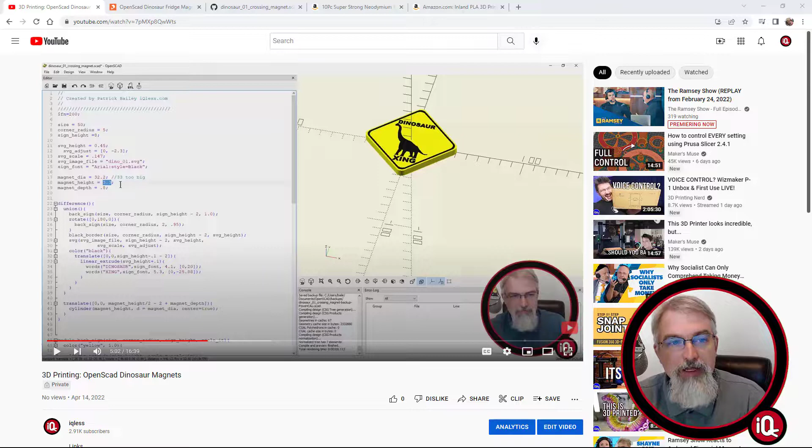Okay, first some URLs, then we'll go over how to create this and some of the thinking process behind it. I already did a video showing how to use the one that's out there, and generally how to use OpenScad and put in the magnet and things like that, so that's out there already.

This is the one we're talking about. It's on Printables, and I'll put a link in the show notes. And for those GitHub type people, it's out here on GitHub as a gist.

Also, Neodymium Magnets. Here's these Neodymium Magnets that I use, I'll put a link in the show notes. These are the big, thick ones. They're $2.40 a piece, but they're powerful, strong, and I really do like them.

And then lastly, here's the yellow that I'm using for these signs, I'll put a link in the show notes. It's the yellow PLA, and it works pretty good. So with that, let's get going on all the OpenScad joy.

So let's get down to this and show this. Here's the one that's all full, but we're going to start blank and show all the little details on there. First of all, we need to start off just by making the sign itself, the square kind of tilted on the side.

Well, first of all, you see that FN 200 at the top there? That just tells you how much detail to put in the whole thing. I forget what the default is, maybe it's 100, I'm not sure on that one. But you can set it, and the higher it goes, the more detail, the lower it goes, the less detail.

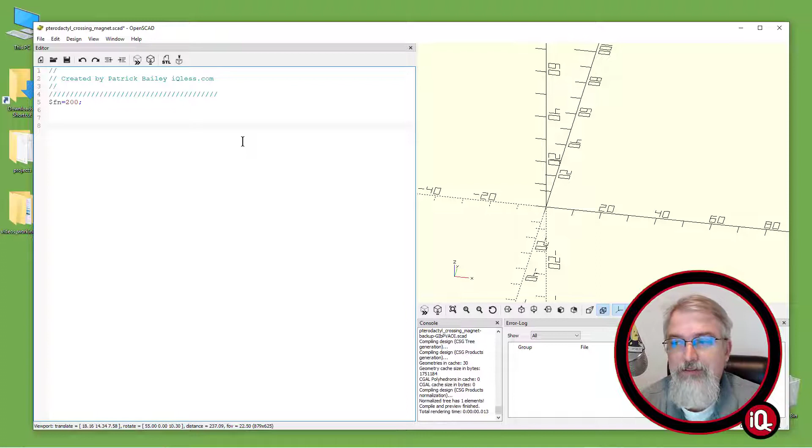So you can change it, it becomes more boxy. But also, the higher it goes, the more time it takes to process. I just kind of use 200, I just kind of like that. It works real well for me right now.

Okay, so we'll start out, we're going to set the size of this. So we'll have a variable called size 50. And then we'll start with a module here, which I called backsign. So we'll say backsign, and we'll pass in the size, or it accepts the size.

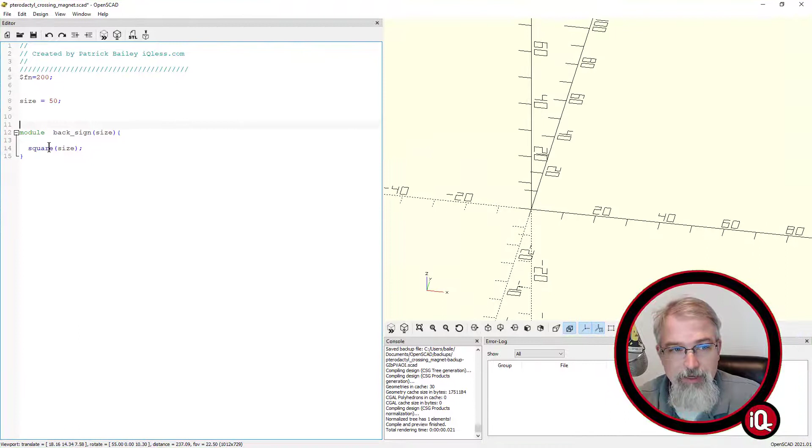Then just to start off, we'll say square, although we're not going to actually go in that direction. But we'll say size, and right now I have that module, but I'm not calling it, so if I run this, I should see nothing happen. So we'll start off and we'll say backsign, and we'll say the size. Boom, we run that guy, now I've got my square.

Now that's all well and good, but one thing I want to do is turn it, which I could rotate 45 degrees, and that would do what I want. Let's do two things just to show you can do it. So we could say rotate 45. Boom. And that gets our look.

But also, I'd kind of want it centered, just to make it easier to place everything. So I could say center equals true, and then it will start drawing from the very center. Very nice. So I could do that if I just really wanted a square, but I like having the rounded edges, because the minute I make something too sharp for a magnet, someone's going to poke themselves, right?

So what I'm going to do is use circles and hulls. I'm gonna come down here, let me see what I have here. Okay, we'll come down here and say a corner radius, because I may want to change that radius, make it bigger or smaller. It looks like right now I'm using 5. So we'll say 5, and then we'll pass in that corner radius. Boom. And then we'll make that a variable.

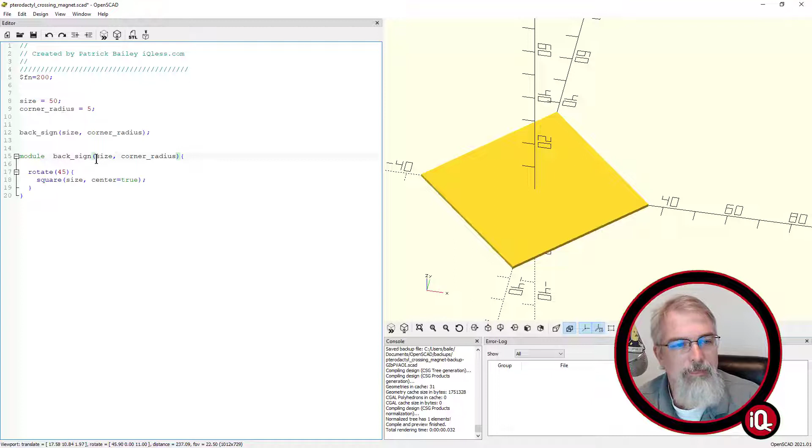So now we'll come down here and say circle of corner radius. Boom. And I'll just remove this stuff since I don't need it anymore. Boom, so now I've got this circle. But what I want to do is make 4.

And I'm basically going to position them, put one up here, one over here, one over here, and one over here. We're going to connect them via hulls. So I'll come down here and see what I did. Got to do a little bit of math here. The distance, they're all going to be equal distance from this very center.

So one will be up a distance of whatever. That's not going to actually be 50, we're going to use a different number. And distance down, distance left, distance right, it'll all be the same.

But we're going to do a little math because of the size. If I moved them that distance, the size across, corner to corner, would be twice that - it'd be 100 millimeters, but I don't want to do that. So I'll say sine 45 times size - I could really just use that.

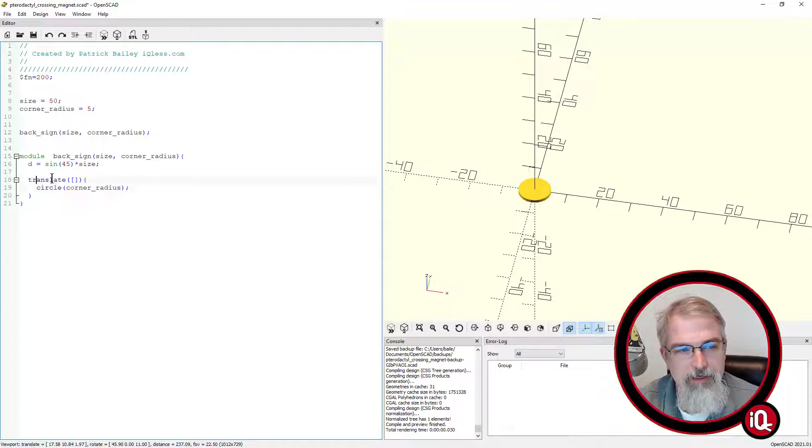And rather than use that, I'll say translate. When you translate, let me just circle this, you can do an X, a Y, and a Z, but you don't have to do the Z. I could do a 0 - we're not moving anything in Z in this case, but I could put a 0, or I could just not put it in there. So I'm just not going to put it in there.

And then what I'm going to do is go over D in the X and up 0. So boom, I got that one moved. And now we'll go make another one. This one we'll make it 0 and D.

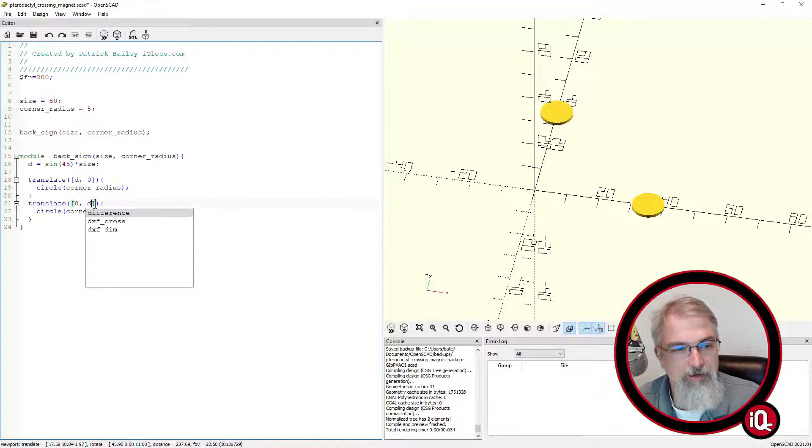There you go. Now, before I just make all 4, I'll do something interesting. For those who aren't familiar with hull, it's a nice little command that will kind of attach everything. It's really nice, and I think for the math nerds it's actually a really nice system. Now you can see it attaches those two.

Now if I have another one, it'll attach the next one. So I can come down here. But when I attach them, it's going to try to connect them all, and it'll kind of try to go on the outer edge of all of them, if you will.

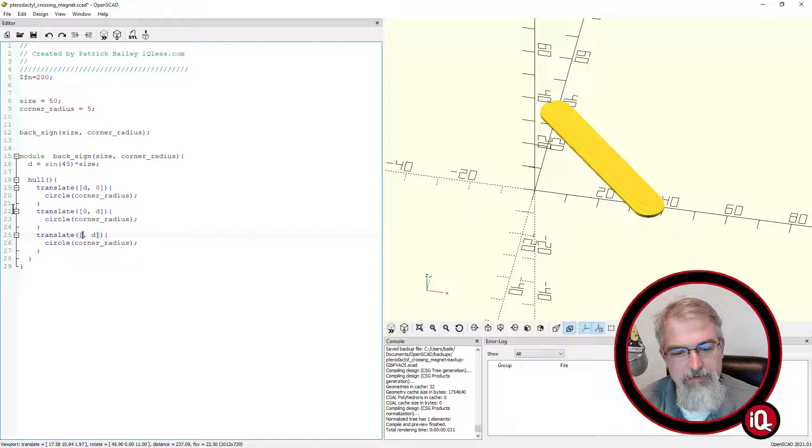So this time we'll do negative D and 0. And boom. Now, not that we need to do this in this case, but just to show you what happens if we wanted to have that little strip go up and down - what we could have done is made 2 hulls.

If I want to do something magical like that, I could say 2 hulls. So I could say, okay, we're going to do that one. Boom, boom, boom, boom - oh wow, I'm repeating it. And then do those. That would work. I'm trying to think my way through this.

And boom. So this part attaches this one to this one, this part attaches this one to this one, and they kind of overlay, so you get that effect. If that's something you want to do, which we don't want in this case, but it's interesting to know interesting ways you can use that hull tool.

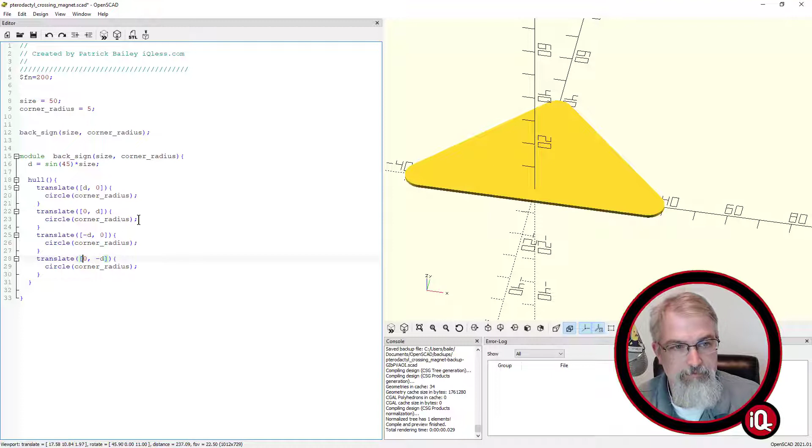Boom. Okay, so lastly, I need to add the last circle. And this one will be 0 and negative D. Boom. So now we're getting that outline kind of how we want.

Now, I'm going to need to reuse this shape in several cases. And if you look at this, I've kind of reused it, let's see, 1, 2, 3, 4 different times. So I've used it once just for this extrude right here. I've also used another one to kind of make this bevel to the bottom, because I found out magnets - you kind of don't want them flat against the fridge.

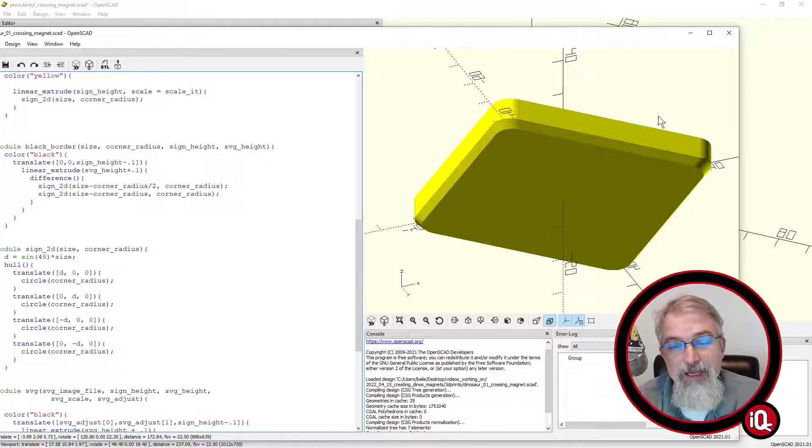You want to have it a little bit off there so you can get a grip on them if you need to - I find it helps. And then also this little black part around here is 2 of them - it's a big one minus a smaller one. So I have to make it 4 times. So it's a good time to reuse that code.

So I'm gonna separate that out. I'll make another module, and I'll call it module sign2D, and it takes a size and a corner radius. There we go, if I can spell. Boom. And then we'll just take all of this - that's exactly what we want - and we'll just dump it in there.

And nope, I grabbed one too many things. Boom. And then I'll come down here and I'll say I want to do a sign 2D, and pass in that size and that corner radius. Boom. Okay, same effect. I haven't done so, but now I can reuse this. I can use this again and again.

So now the next thing I want to do with this guy is, well, first I want to color this one yellow. And I'm going to put an alpha in here, but I'll put an alpha of 1.0, which means it's not see-through, but I just want to put that alpha there for convenience when I do want to tweak it a little bit to make it more see-through.

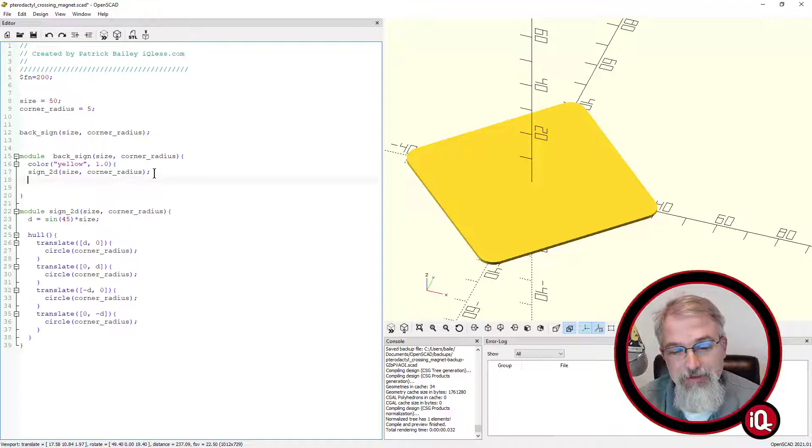For those who don't know, and I had to go learn this myself, when you use this alpha, 1.0 means completely opaque, non-transparent, and the lower you go, it goes between 0 and 1, so 0.5 is kind of like halfway see-through. But you'll see that here in a bit.

Okay, so now we've got that, and I want to do a linear extrude. Linear extrude. Boom. But how much do we extrude it? I'm looking at the wrong thing in my other code here. Boom, boom, boom, got distracted. Sign, there we go. Linear extrude. Oh, I'm using it, never mind.

I'm not linear extruding here. I could. But I'm not, apparently. Oh no, never mind, I am. I did, and that makes sense. Some of these times I look at my old code and I end up fixing things. In this case, I just got myself a little off track.

So we'll do a linear extrude, and what we're going to do here is we're going to do a linear extrude of the sign height. So we'll put a variable here called sign height, and... I keep messing myself up in my mind here. Back sign, back sign. Yep.

Why did I put a scale here? I did something confusing to myself. Let me see. Oh, well, I have some code in here that I don't need. That's funny, look at the side.

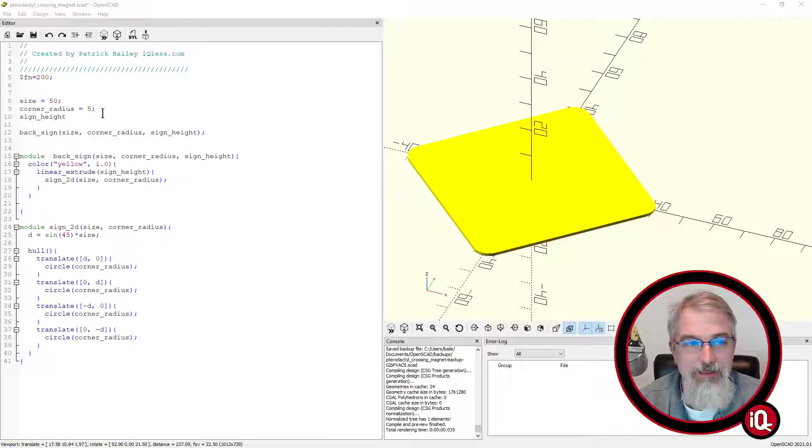Okay, so we'll have this linear extrude, and we'll use the sign height. Okay, so we'll pass in that sign height, and then here we'll pass in the sign height, and then we need to set the sign height. And let's see what I set it to before. I set it to a sign height of 8.

Boom. So with the sign height of 8, now if I do it, it'll actually have some depth to it, and there we go. And the nice thing now, I can tweak it a little bit. If I didn't like that radius, I could make it 15, make it a much bigger radius, and do everything based on that. Yeah, there's a point of contention there.

Yeah, although that size, there's some bad code. Because, let me make sure I didn't do it differently in my code. Yep, I didn't account for the corner radius. Okay, so there's a problem. So if I wanted this to be consistently this size, here we go, fixing some code.

What I want is this distance to be equal, so I need to account for the radius. So if I make this radius bigger, it's going to be bigger, and that's not probably what I want right now. So I need to account for that. So I have this corner radius and the size, which means you have that go out, you have the size, and then you actually have to subtract the radius, don't we?

Subtract, I think you subtract the diameter. 2 times that, boom. Which is going to make that smaller, which means I actually have to add that diameter back in up here, and there we go.

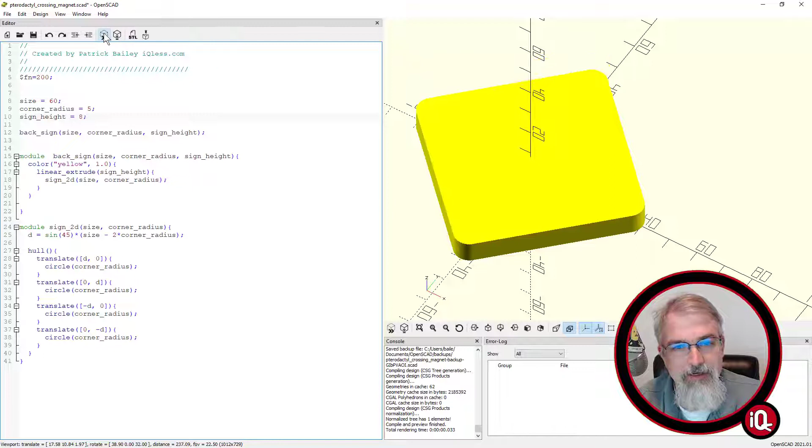Okay, there's some code I need to fix. So around that being 50, we'll make that 60. And now we're a little more parametric, so I can keep that size and change the radius. So I already found some bad pieces of my code. Okay, so 8 is the depth. I can change that to 18. There we go. Okay, good. Already fixed the code. Or made an improvement.

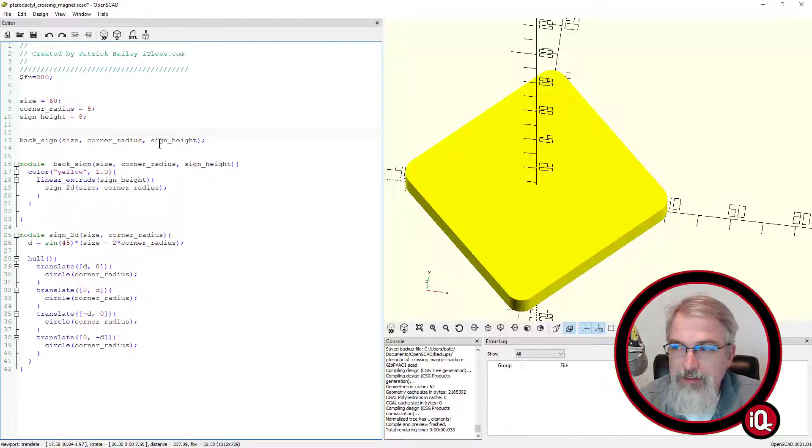Okay, so we got this yellow here. So now the next thing I want to do is reuse this back sign, and we want to pass in... we want to make a black border. Oh sorry, let's actually make the bevel first.

I just got up to my code. We do want to pass in one more variable. We're going to pass in a scale, and so we're going to have this scale here. We'll say it's 1.0.

And we're going to come here and pass in this scale again. We'll say scale equals... we'll just call it scale it. Boom. Because we're going to come down here and scale it as it pulls up, you can tell it to change its size. So we have to set the variable scale equals scale it. There was a reason I did that.

Now if we do 1.0, nothing happens. Let's see, it's complaining about something, line 19. Oh, linear extrude. It's in the linear extrude, sorry, not in the actual, my bad. In the linear extrude, that's when you scale it.

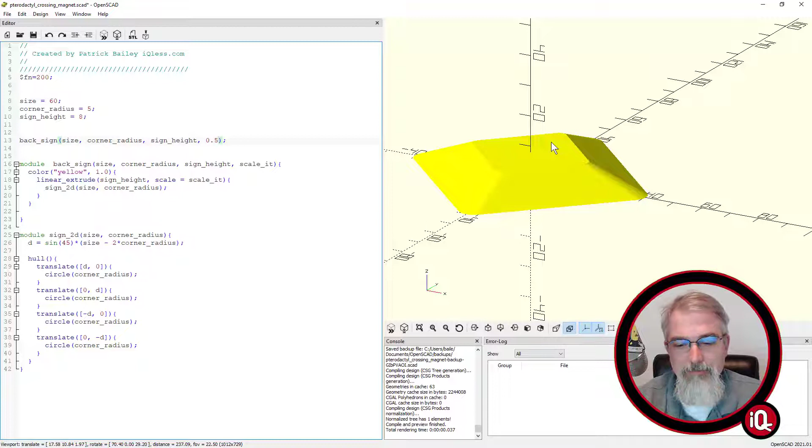Now if we're scaling it by 1.0, no changes. That means it's going to continue up the same way. But if we change this and put in 0.5, we'll see it shrinks as it goes up. Now for this first one, we don't want to do that, we want to keep it at 1.0. But actually in this case, we're going to hide it a little bit. I know what's coming out. Okay, so we'll get rid of that.

Because what we're going to do is make the bevel go up, and then we're going to flip it. So we'll say this bevel is going to be... let's see, what are we going to do with the bevel? Size, corner radius, but we set it as size. Yeah.

We're going to say sign height. Ah, there we go. Sign height minus 2. And over here we're going to put 2. We're going to make this a set 2 for right now, but we could make that a bevel height. So we can say bevel height.

Equals 2. Yeah, let's make it a variable. I didn't before, it's probably better to make it a variable, that way it's easy to tweak because it's in 2 locations. Okay so the bevel height, and we got the sign. Boom, boom, boom, what do you not like about that? Ah, I forgot to put my semicolon there. There we go, semicolon. Now we're good.

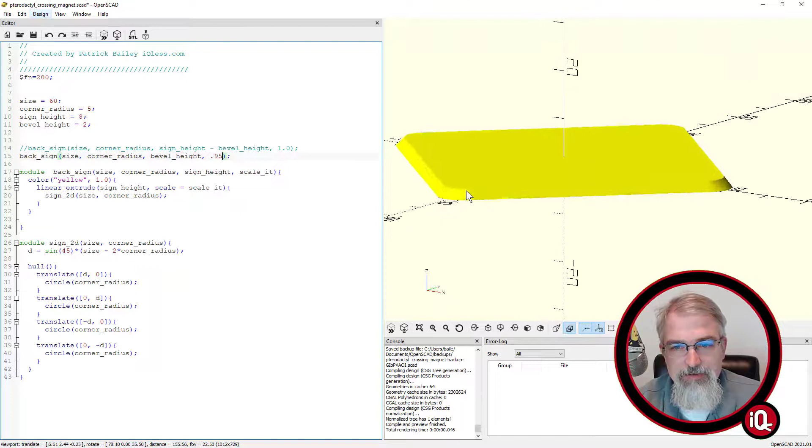So we got the bevel height, but here we're going to scale it a little bit, and we're just going to say 0.95 and have that as a set. So you can see it just kind of bevels in just slightly. But right now, after doing that, it's not the right way.

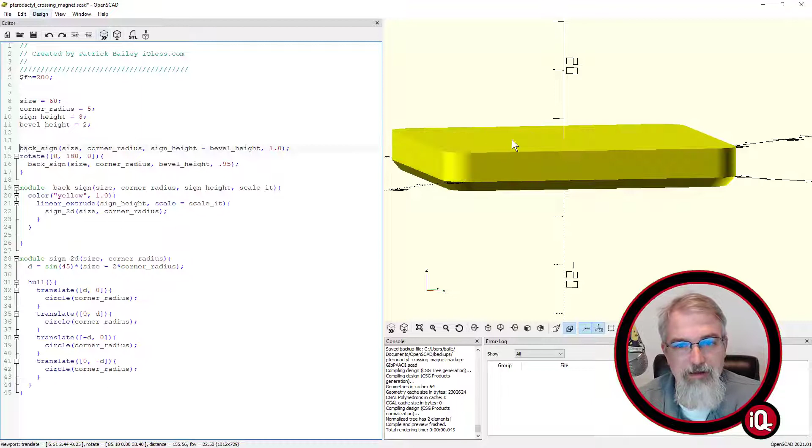I need to flip it upside down. So we'll come over here and say we'll rotate it. Boom, boom, boom. And we'll say we're going to rotate it 0, 180 to flip it over, and then 0, and it should flip over. Now it's upside down. And now if we bring this guy back, boom, now we got that little bevel, and we kind of have the base of where we want our magnet to be.

So fantastic, so next we're going to bring in that black border on the top. So we're going to come down here and say... I don't know what I called it, I called it back border. So I'll make a back border, which I'm going to pass the size into, because I need the size for the top. And I'll say corner radius, and the sign height. I need to know where it is, minus the bevel height.

And let's see, and then the SVG height, because we're going to bring in an SVG at some point, and we want it all raised just a little bit. So now we'll come down here, the only variable I'm missing now is SVG height. Boom, and what did I call that? Boom, boom, 0.45, 0.45. Okay, so we pass that all in.

We got this border, back border. Fantastic. And I'll come down here and say module. Boom, boom, boom, boom. Now if we run it right now, nothing should happen. I shouldn't break anything, but I did break something.

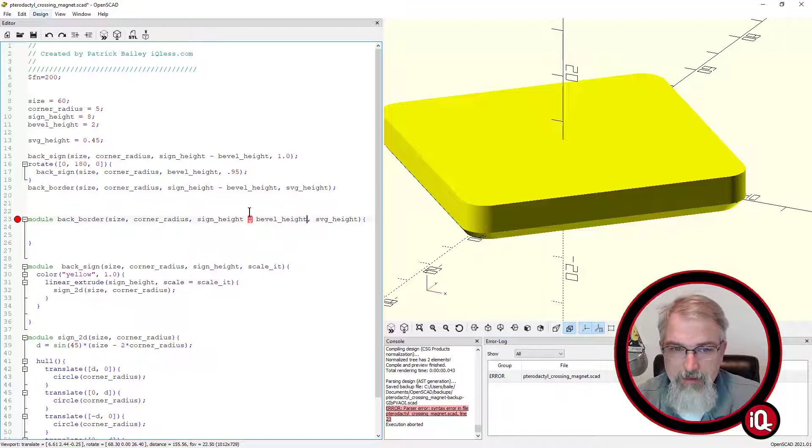Oh, I will call that... well, I need to change that into a variable, so what did I change that into? Back border, sign height. I just called it sign height in here. Okay.

Well, call it top height, what it really is. Okay, so there's the top height. So we got this back border, and we're going to come down here, we're going to color this black so we can see it how we expect it to be. And again, I'll give it an alpha of 1.0.

So now we're going to reuse that, well, let's just so we can see it, we'll comment these guys out here real quick. And we'll come down here and we will say assign, we'll reuse the sign 2D. In fact, I'll just kind of copy this sign 2D right down here.

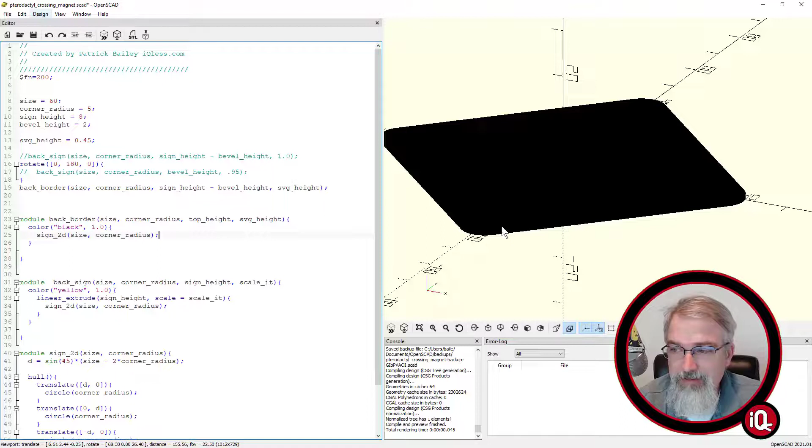We'll say sign 2D, size, corner radius, right? Boom, so we get this big guy. But we don't want it quite that big. So what we're going to do is we'll say the size, corner radius. What am I going to do? So what I did is I said size minus the corner radius.

Just using that as a variable there. Corner radius divided by 2. So it gets kind of close to the edge, but it's programmatic. And so what I'm going to do is I'm going to take that one and then make one that's slightly smaller. In this case, I'll actually subtract the corner radius. And now if I run this, they're both over top of each other so you can't tell.

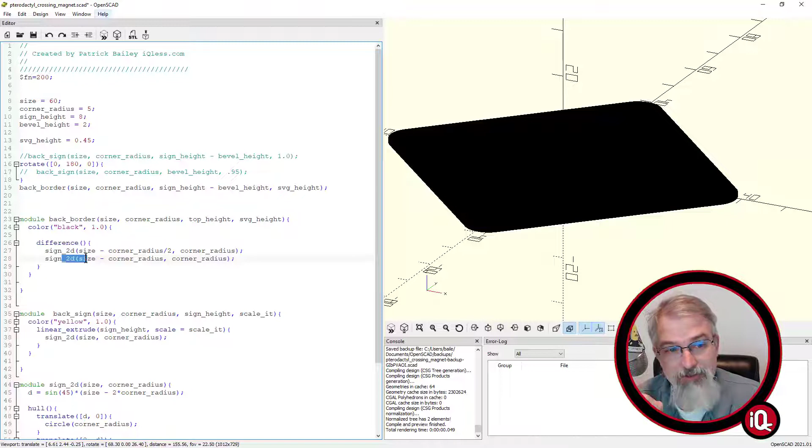But I'll do a difference. And for those who haven't fiddled with a difference, what difference does is it takes whatever's first here, it'll create that, and everything else afterwards, it'll subtract that shape from it. So just be aware that if you have more than one shape beyond the first one, it'll keep subtracting, which is useful. Boom, so now I've got this.

But I do need to extrude it. So I'll say linear extrude, and I will extrude it the SVG height. Right? Well, the SVG height. Now in my case, I keep adding a little 0.1. I don't know if it's really necessary. I'm just a little overkill to make sure it actually.

I add a little bit, and then I move it down a little bit just to make sure that the shapes are within each other. And then when I do a union, we don't have any issues with faces. I may be a little overanal on that. It may not be an issue, but I continue to do it.

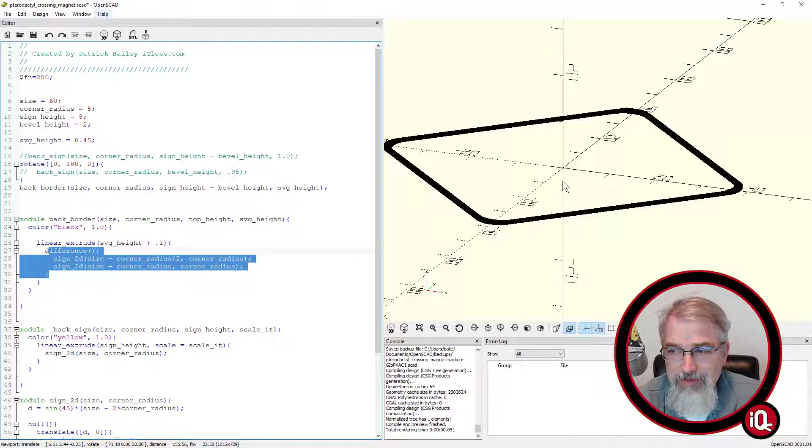Okay, so now we have that. If I bring back, and this actually has a depth that's just very thin, but it has a depth. If I bring back the other guys, we're going to miss it because it's actually inside. But we can come back into this yellow, and we'll make it a little see-through, 0.5.

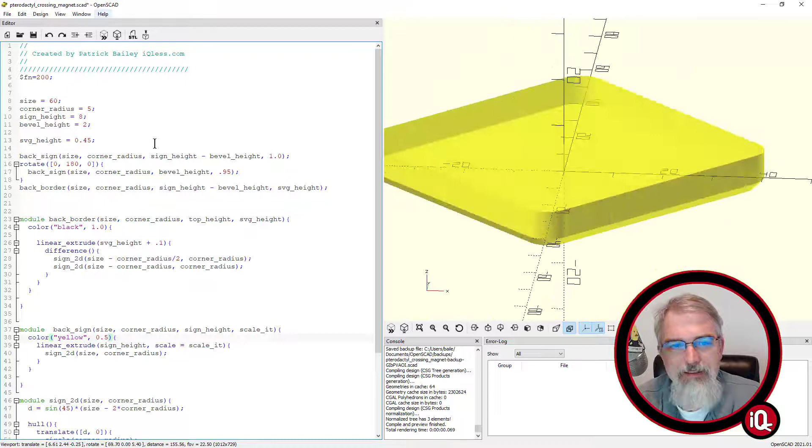You would think I would be able to see it. But apparently not, I'm not see-through enough. Let me make myself really see-through. Huh, well, so much for that. You'd think you'd be able to see that black, but I can't. Okay, well, I'll give up on that for a moment.

But suffice it to say, it's there, but it's actually at the surface. We need to move it to the top. So I need to come back here to the sign, to the back border. Boom, and we need to do a translate.

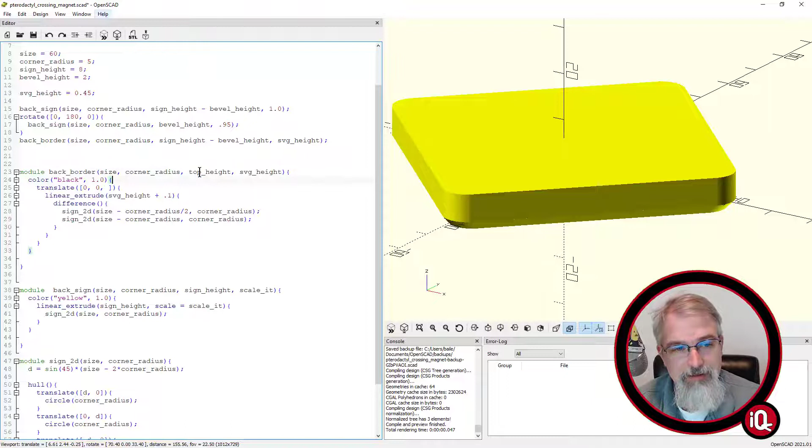Boom, and I don't need to move it in X. I don't need to move it in Y, but I do need to move it in Z. And I need to move it to that top height to get it right at that border there, but I also want to subtract just 0.1 because I added that back into the height afterwards. Otherwise, because I want it to be a little bit lower. And boom, there I go. We are right exactly where I need to be.

So now the next thing, let's see, now the next thing we just need to add the SVG. So we'll come back in here and we'll say SVG. I just called it SVG. Okay, so I'm going to make a module called SVG. SVG.

And then we'll come in here and we'll make it empty right now, so nothing there. Then we're going to put some variables in here. So we'll say SVG. What did I do? I'm going to say SVG. I want the image, SVG image file.

Now, located in the same directory, I have dino_01.svg, and I can bring that in. Now, if I don't know exactly where the file is, or if it's not in the same folder, I can go over here and grab that file, choose a different line just so you don't get yourself confused, and then drag it over and drop it. And this will show you the entire directory, where it is, and it'll work. But in this case, I'm in the same directory, so I'll just continue on in this fashion. Okay.

Okay, so we've got the SVG image, and then I want to do an SVG scale. I'm going to have to scale it. And it looks like I did 0.147, but you could adjust it based on whatever image you bring in. Oh, in fact, I just did that.

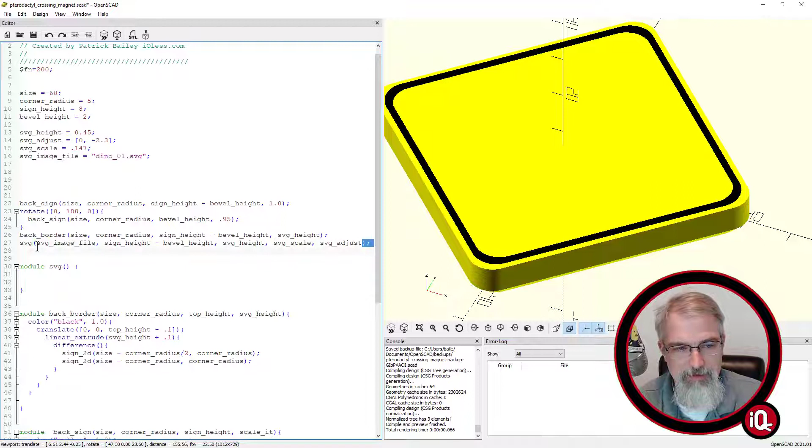Now that we've changed that variable, right? So sign height minus bevel height, and the SVG height that we're going to use, and the SVG scale, and the SVG adjust. And I'll just copy all these so I don't mess it up into the module.

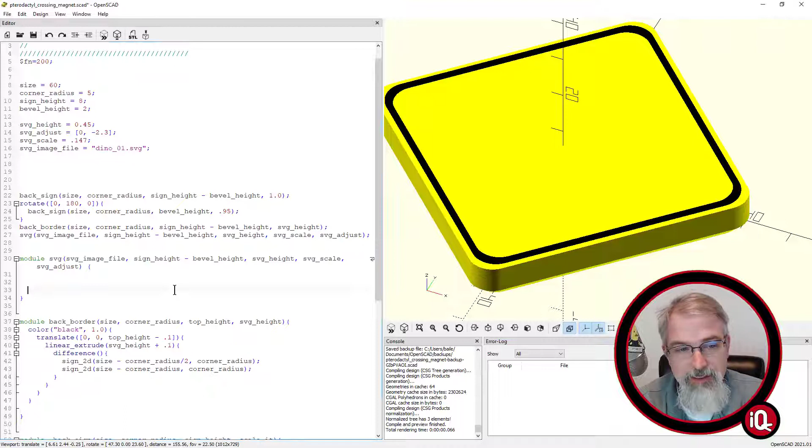Boom. Then I'll come down here. Now that I've got the module, we'll start to write it. Let me just go over so I can reference it here. Where are you, module? There we go, SVG image. So we'll come down here and we'll say import SVG image. And that should import it.

Oh, well, I can't do an equation right there. We'll call it top height. My bad. Unknown variable SVG image. Oh, SVG image file. There we go.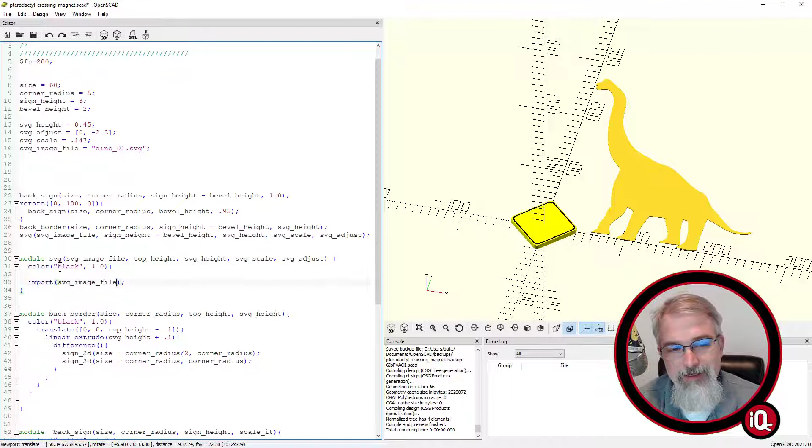So you can see he's over there and he's a little on the big side. And also we want to color him black. So say black. Boom, 1.0. You don't need to put this alpha in there. The only reason I'm doing it is so if I want to change it later on for convenience and make it more see-through, easier to see. Boom. So now he's black.

So now we've imported him, let's scale him. So we'll use that scale. Well, we can scale, we want to scale in X and Y, but not Z. So we'll do this. And we'll use that SVG scale. SVG scale X, SVG scale Y, and Z.

Boom. So now he is much smaller, but he's also probably hidden underneath here right now. So can't quite see him. In fact, if I take away the back sign, you'll probably see him. Yep. See, there he is hiding.

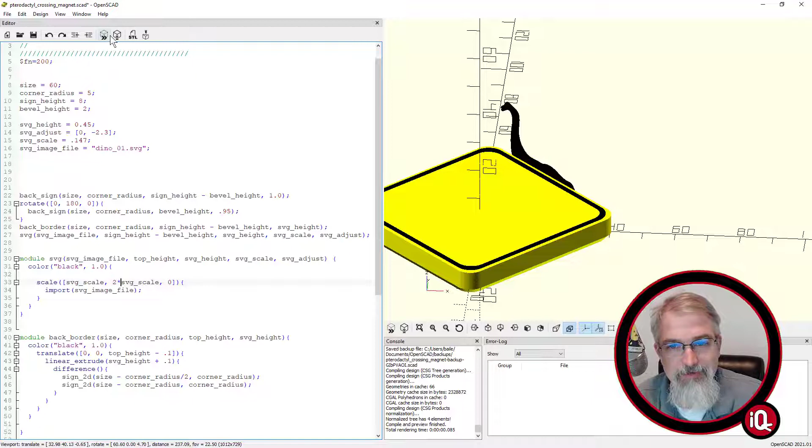Boom. Now, next thing we can do, now, just to let you know, we can actually, the scale, you can scale them differently. So you could make him crazy, you can warp him in a sense. So now I can make him oblong if you wanted to. I don't want to in this case.

Okay, so now we got that. We need to do a linear extrude. Boom. In this case, we're doing the same linear extrude that we see down here and the same translate, so I can literally copy this. Or, you know, there are some ways I could combine that, make another module, but in this case, I'm going to keep them separate still.

Nah, come on. Boom. Boom. Let me just double check that. So we have, I'm going to extrude it +.1 and move it. There we go. Boom. So now he's on the top. But he's not in the right location.

So we're going to translate him a little bit with the SVG adjust, which there's different ways of doing it. So I think I'm going to change the way I did do it. You can translate, you can have nested translates just fine, which is what I'm going to do here. Because I kind of prefer this new way of doing it.

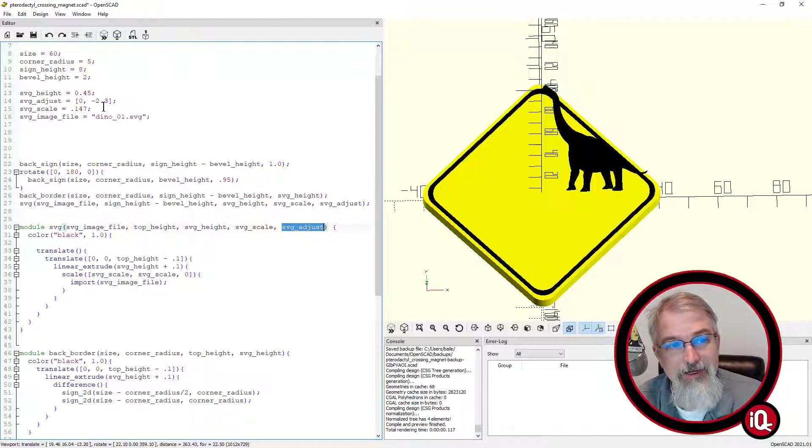So I can take this SVG adjust, which has an X and a Y. You can see right here, it's an array with 2 variables. Or we consider an X and a Y. And I can pass it in just like that, and it will adjust it. It didn't adjust it much. Wow.

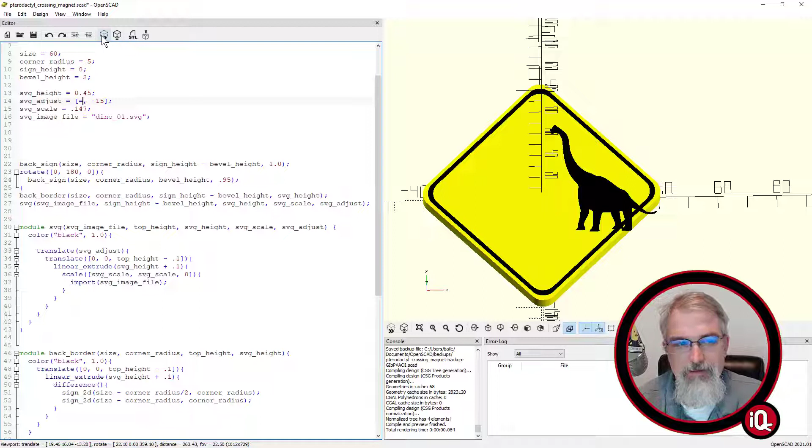Let's see, we'll say -10. -15. Okay. -20. So we can adjust him and move him around.

Now, in all honesty, I was actually going to go do the pterodactyl. So let me stop and change this, because there's a pterodactyl file I have here. I'm going to copy that over here. I haven't made a pterodactyl magnet yet, so we'll go make one. In fact, I'll probably post it after this.

Pterodactyl, there he is. And we need to change the height of that, change the scale. Let's make him a lot bigger. And we need to adjust where he's at.

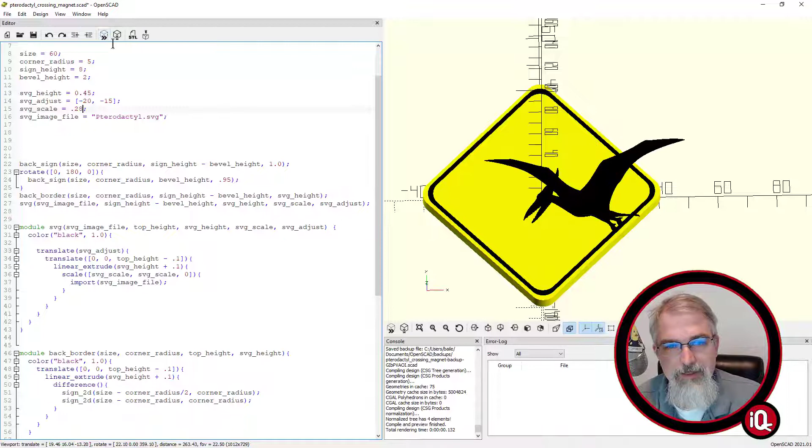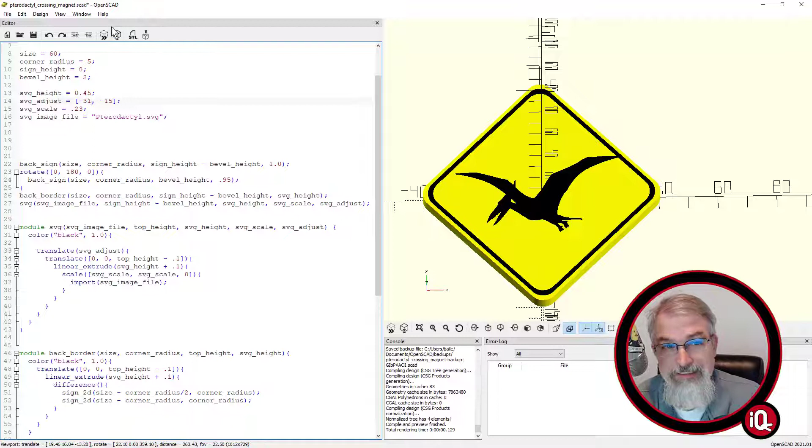Okay, too big. Probably go a little bigger maybe. Okay, -31. Okay, that seems workable. So we'll leave him there. So there he is with the pterodactyl, and he is good to go.

Okay, let me double check on all my brain here. So color black, he's in the right location. He's extruded, so he'll be available. He's there. Okay, so the only last thing we've got to do, well, a couple of things we got to do.

Let's do the wording first. And then we got to do the last thing about the magnet, which is always fun. So I'm going to come down here and I'll make a sign font.

I'll say I'm going to make it Arial, but here's how you can make it different fonts. So what you need to do is go up here to your help menu, go to your font list. It'll show all your fonts here, and then you search for one you want. In my case, I'm using Arial Style Black. There we go. And then copy to clipboard. And then boom.

In fact, you know, I might change that because I do have this font I just downloaded for another video, a Jurassic Park font. That might be cool. We'll see. It may or may not be cool.

We'll see. Okay, so now we're going to come down here and we're going to do this thing called words. So I'll come down here. I'm going to make this module called words, where you pass in a word.

Well, I'll just say pterodactyl for now. I hope I didn't spell that wrong. P-T-E-R-O-D-A-C. Okay, I think I'm good.

We're going to pass in whatever word we want, and then we will say the sign font, passing in the sign font variable. And then we will pass in a font size. In this case, I had 4.1 listed before, but we may change that. And then we'll pass an array of an X and a Y, just so we can adjust it. We'll say 0, 0 for now, but that gives us the power to move the text around.

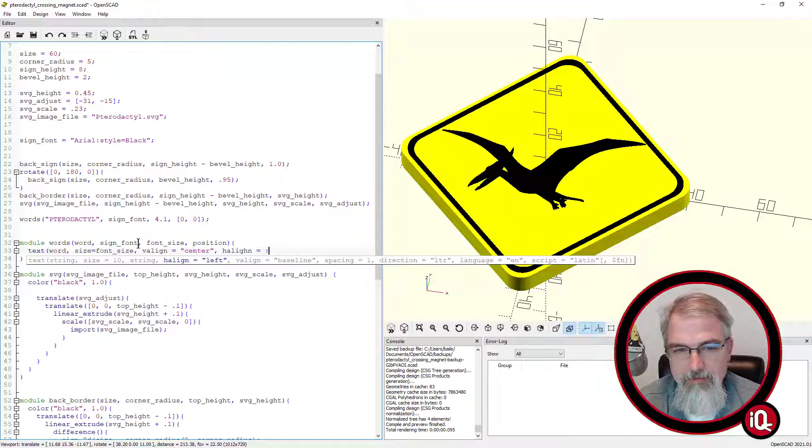Boom. And we'll come down here and say the text, and we'll say word, and size equals the font size that we're passing in. And then, things I like to do, to center it, I just say align vertical align equals center, and horizontal align equals center. Oh, I need to put that in quotes. Center. And I think that's good.

Now this would work. I mean, if I do that, it's there. Oh, H align, spelled that wrong. It's there, it's just in the center here.

But I need to move it, and I need to linear extrude it too. So we're going to go down here and we'll say we're doing it both in the same place. So we're going to say, oh yeah, that's how I did it. So I'll say translate, position, passing that X and Y in.

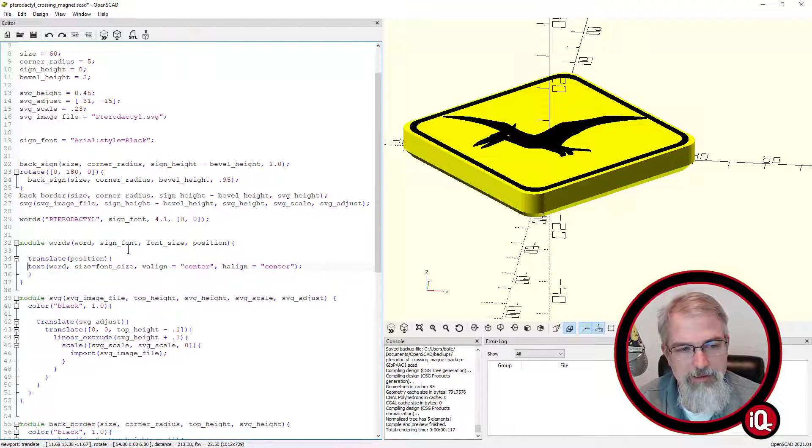Boom. You know what, this is going to force me to update some more of my code. So we got that position. I have not yet linearly extruded it. But now if I have that, and I go, okay, I'm going to move this over 100, we should see it pop in somewhere. There we go. There's the pterodactyl. There we go.

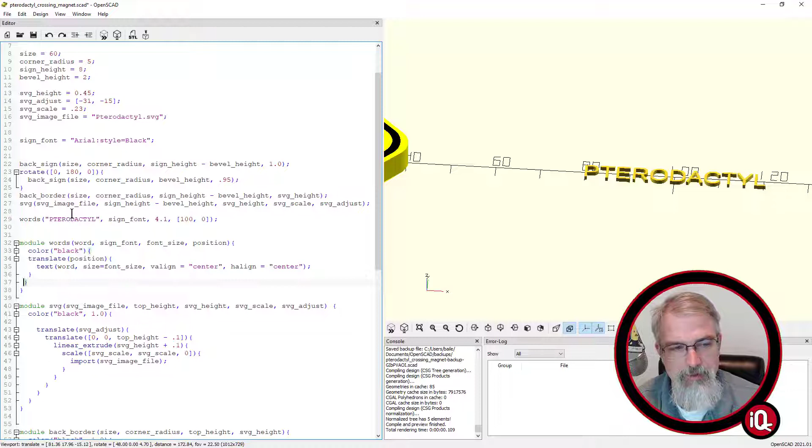And we're going to say, what did I do? We'll say color black. Color, well, I'll do it in here, a little adjustment to my old code. Boom, boom, boom, boom, boom, boom.

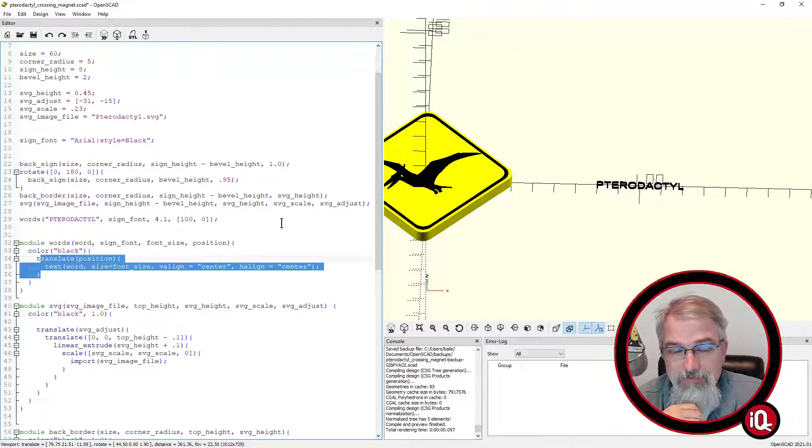There we go, pterodactyl. But I haven't yet got it in the right location, I haven't repositioned it, and I haven't extruded it yet. However, one thing I've noticed, I'm moving that back border and the SVG and the words to the same height, and I'm also extruding the same, so why not let's do it all in one go.

So we'll come down here and kind of copy this part. We'll say the translate and the linear extrude, we'll say right there, and we'll close it out here. Boom, boom, boom.

Boom, boom, one, two, okay. Cleanup here.

Now this is going to be a double whammy, so we need to go remove those from the other guys. I'm just going to comment them out real quickly before I delete them, and then I have to comment both of them out. And extrude and translate. Boom, boom. Make sure we're okay... messed that up.

Unable to convert. I probably passed a variable in up here. So we have the top height, which is a variable I'm passing in, so we're going to have to say sign height minus bevel height, right?

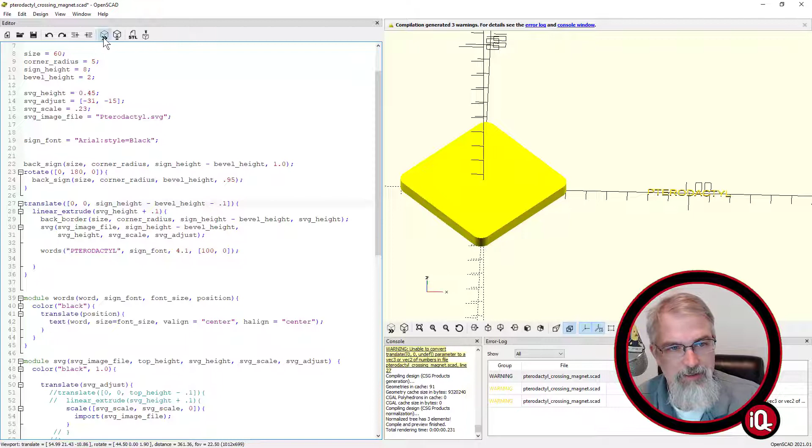Boom, and there we go. But then now, since we're doing it here, the color's not being applied. So we'll do the color out here. Color is black. Boom, boom.

Boom, boom. Oh, I missed something. Oh, one too many there. Boom, now there we go. So we'll take this, do a little cleanup, and we'll remove this stuff. Remove this, clean it up a bit.

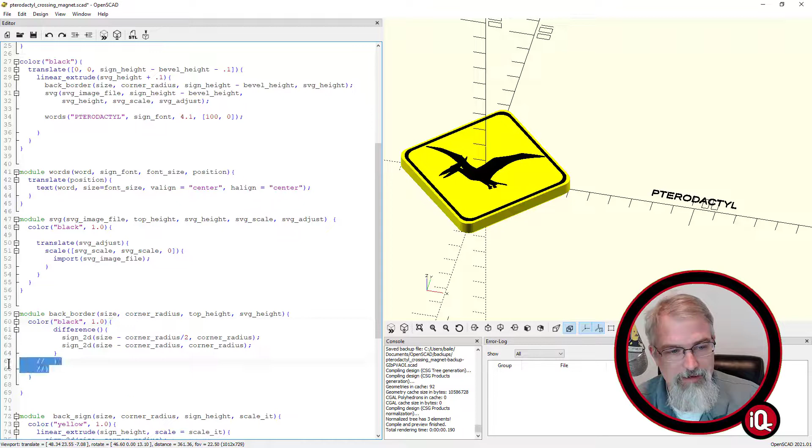Boom. Okay, so now we'll do that zero, zero so it shows up somewhere close. There we go. So now what we probably want to do, since this is all being... we could put that in a module, but I kind of like where it's all here. I'm actually pretty happy with that.

Okay, so we'll take these words, we'll make another word, but this time we'll do the dinosaur crossing. Same thing, sign font, and we'll say we're going to move this guy up. What did we do before? We said 20 up, and we said negative 25 down. Boom, there we go, we got the crossing.

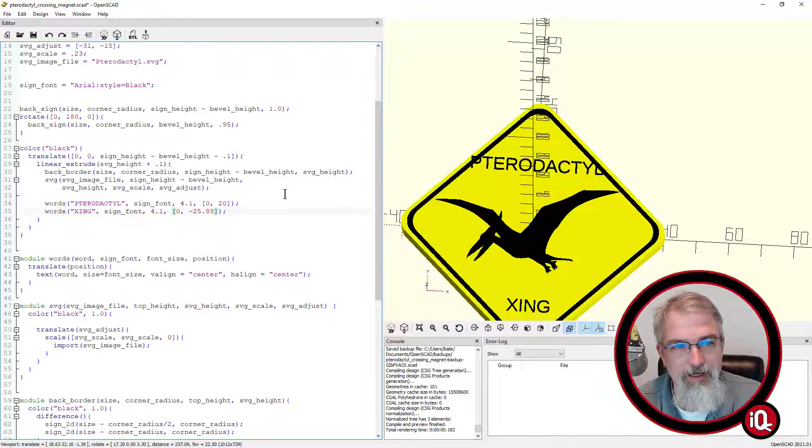But the font doesn't look right, Arial style font. Something's not quite right. Sign font was assigned... oh, we got that overwritten in file. We have an issue with the sign font.

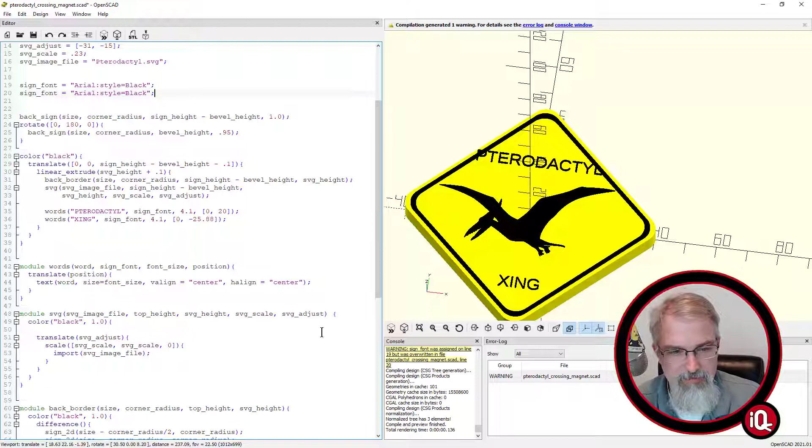Okay, we forgot one last little piece, which is actually telling it what font to use. So you say font equals sign font. No wonder it's not using the right font. I didn't tell it which font to use, so it just probably picked the most generic one.

So there we go, now we got the crossing sign. Let's go back and make some adjustments to it. So I'm looking at my code over here - for the crossing I use 5.3, and there we go.

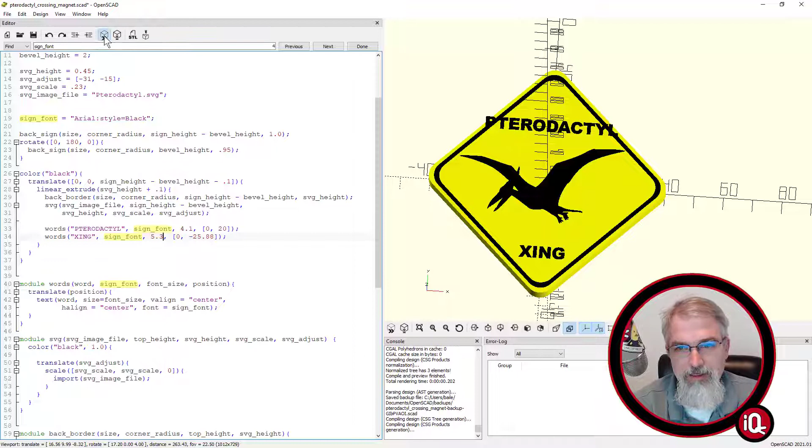The pterodactyl naming convention is a little bit big, so maybe we can lower it a little bit. Probably a good place to put it, but still too big of a font, so we'll make it 4, 3.8.

Probably lower it a little bit more. 17, and 3.7. Maybe lower it just a slight bit more. 16.5. And boom, we got a pterodactyl.

So far so good, we're almost there. But we got a problem. We got this pterodactyl, but we got no place to put the magnet. So there's no gap, there's no void in the center to actually put the magnet. So we're going to do a couple of things.

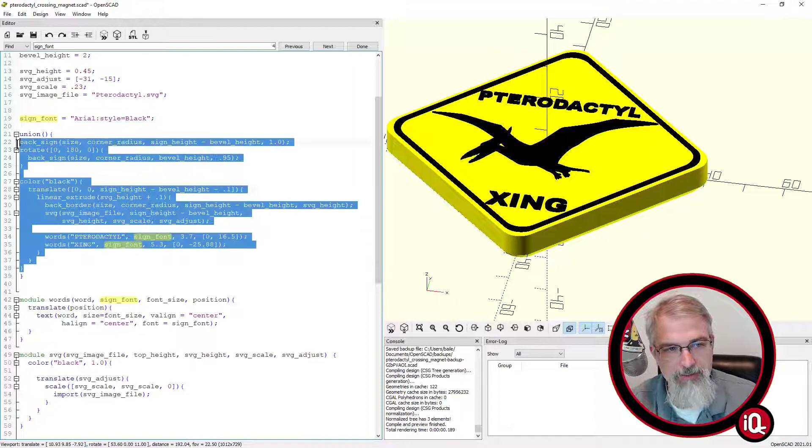We're going to come up here and we'll say a union. We're going to take everything we've made so far and make it one object, just so it makes it much simpler and we don't have to worry about fighting to subtract the void of the magnet as you might move it around. Okay, so now they're one object, and then what we're going to do a difference.

But before we do the difference, we're going to take this. And I think I can come up here, let's see, make it... there you go, hashtag. We'll use one of these modifiers. So, well, this tends to fight me, doesn't it?

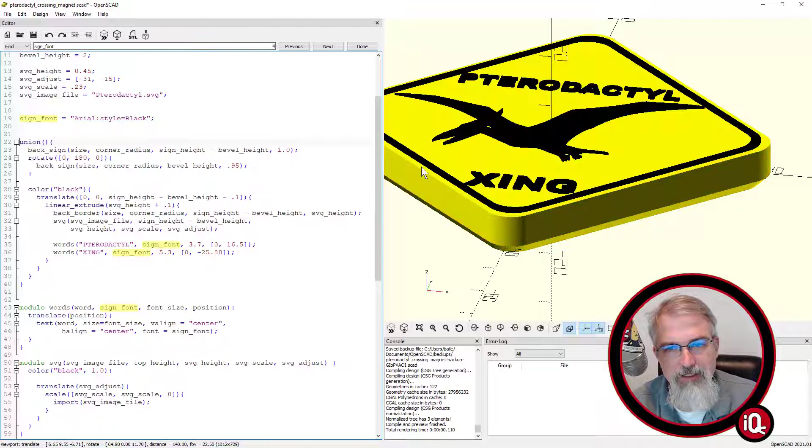Well, we'll see what I can do about this with the modifier. And that yellow wasn't showing very invisible.

Okay, we got to make this cylinder. It's really easy because with this magnet, we only have a couple things: the magnet diameter, which I suggest using 32.2. But be careful, because what if they make a bad batch and it's slightly bigger or smaller? I'd suggest whenever you print these out to do one test run, making sure to stop where you put the magnet in.

But if it's too big or too small, make adjustments and fix it. So there's the magnet diameter, magnet height, same thing, you might need to adjust it, or if you choose a less powerful magnet, make this smaller. And the magnet depth, which I set to 0.8 - that's how far it is from your fridge, from the bottom up, it's 0.8 millimeters away.

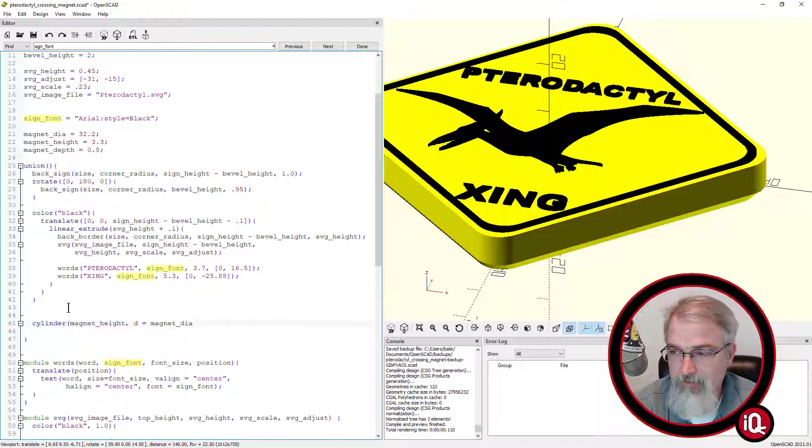So then we'll make a cylinder. Simple enough - we'll make the cylinder the magnet height, and we'll make the diameter equal to the magnet diameter. Boom, there you go. And because we got everything centered, it's really easy to position it. We'll say center equals true, and it's all centered, and life is good.

And now it's there, but it's kind of in the middle, and we need to adjust a little bit. If I go here to the yellow, let's see if I can make it a little more see-through so I can see it. Boom. Yeah, I can't see it - my transparency is transparent, but I can't see the gooey center.

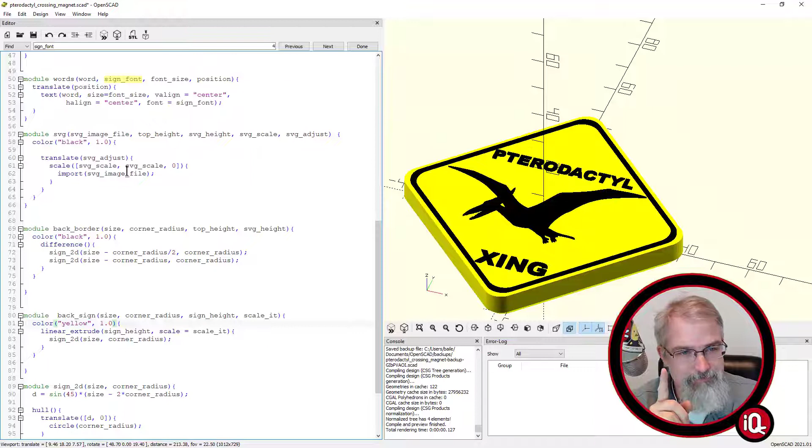I think I have an idea on how to show that. Okay, so we got that. I got an idea - so now we need to translate this to move it into the correct position. Right now where it lays, it's actually not laying on the bottom or next to the fridge yet - it's actually in the center.

So I got to do a couple things - we got to translate in the Z, so we'll say 0, 0, and then the magnet. In truth it's actually not at the center, because we told this thing to center itself - it's actually halfway above the z-axis. So we take that magnet height and divide it by 2, so now it actually is at the center. And then what we got to do is...

I said /2, that's what I did. So now it's at the center, and then we got to drop it down to the very bottom, which is that bevel height. So we'll drop to the very bottom, and then raise it back up again by the magnet height. Boom. In fact, let's focus on this guy using one of these modifiers.

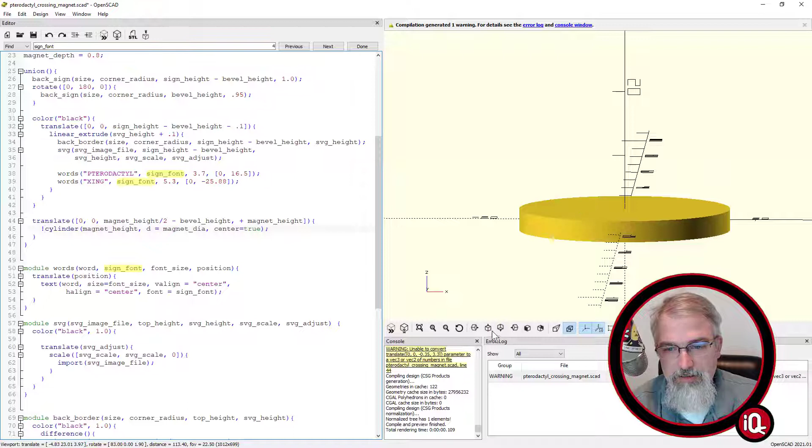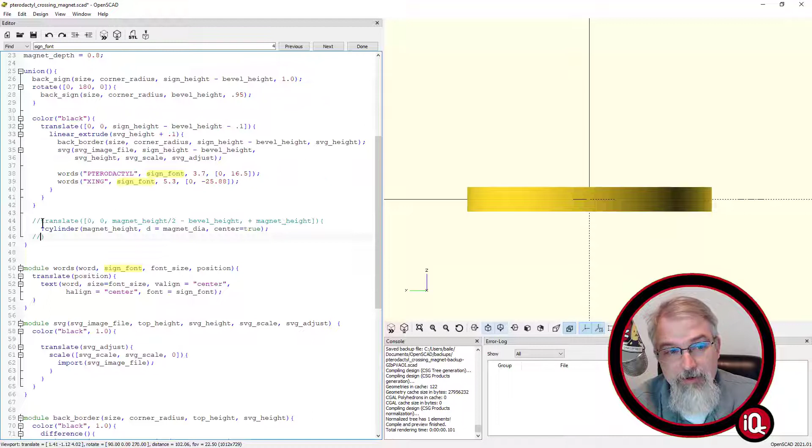So what we're going to do, let me show it from the side. Boom. Okay, if I don't do anything, this guy is going to be exactly centered because I told it to center. Now I want it to be 0.8 from the very bottom - I'm not sure where that is yet. Let me copy this translate so I can walk you through my thinking process and do the math.

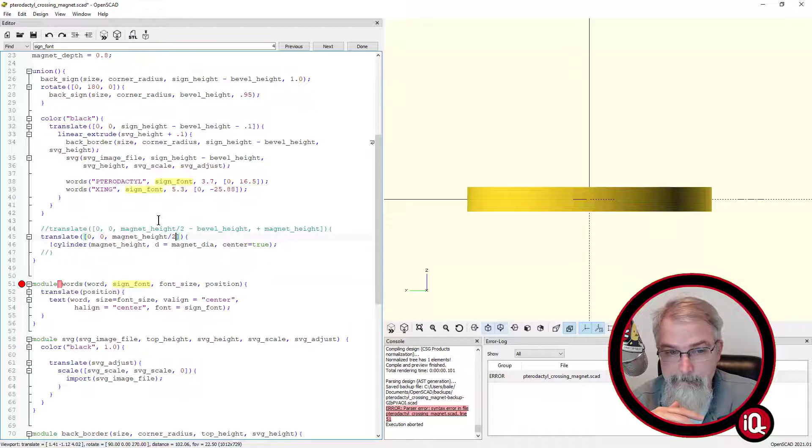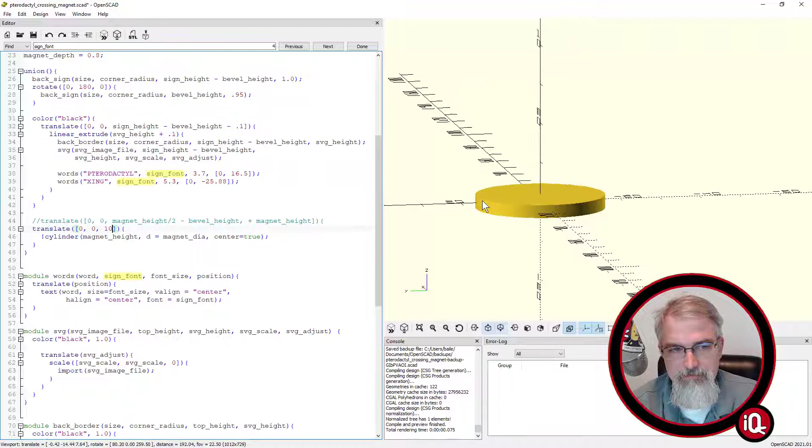So what I'll do is raise it up to the line - which you don't like that. What are you complaining about? Let me put everything back - oh, I commented that out, that's why it's complaining. Okay, so if I do this, it should raise it back to the height. Oh, maybe I have an issue here. Let me just exaggerate. Okay, why aren't you changing position? We have a translate.

Maybe it's because I'm not focusing on that. Oh, that's kind of strange, I didn't think about that. Yeah, okay, because I focused on that, not on that - interesting. Okay, so I focus on that. Learn something new - makes sense, but it's kind of funny.

Okay, so now that I can see it correctly, I'll say that. So what I'm going to do is move it just up - so now, boom, it's at the line, which I can think of. And then I'm going to bring it down because of that bevel, which is lower - bring it down to the very end of that bevel height. Boom, so now it would be touching the fridge.

And if I left it like this - in fact, we'll bring everything back, and you can see it's kind of touching there. And if I did a difference, which is my end goal here - boom. And that's also why I did a union here, because we say union - oh, I need to get this out of the union, that's why. Oops, union of everything, boom.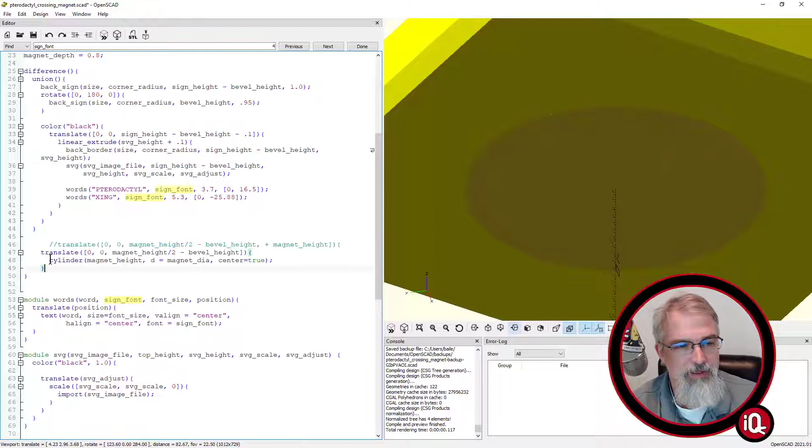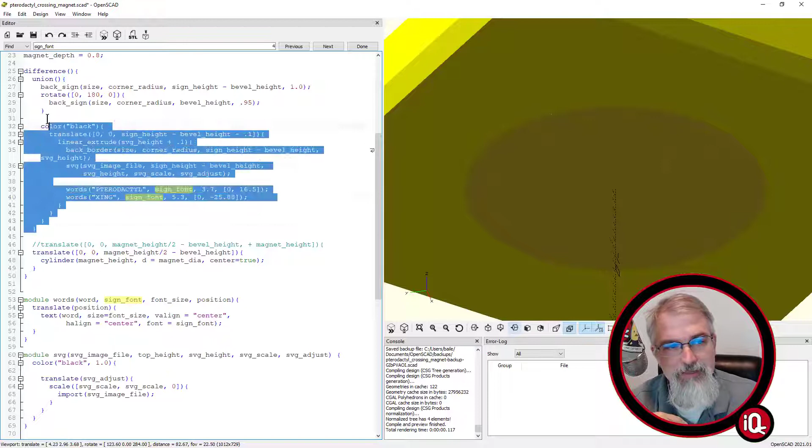There's a reason I have that union. Like I said, with the difference, it takes the first object and subtracts every subsequent object. With that union, that becomes the first object—everything in the union is the first object, the other one subtracts.

So if I do this, you'll see it's a little bit funny because it's right at the edge, so that's confusing. Let me come back here and concentrate on this again, because that's not actually where we want it. Okay, so what we want to do is now we're at the bevel height, but then we want to get away from the fridge, and the distance from the fridge is that magnet height. There you go, and that's what we expect.

Take that away, and now I can view everything. So now it's in there, and there's a void. But let's put a little thing in here to test that theory out.

So we'll do another difference. I'll come down here and be lazy and make a cube. I'll say 200—boom, we'll make it big, so here's this giant cube. And we'll do a little translating. Translate... something, something, -20, -30, just so I get it below.

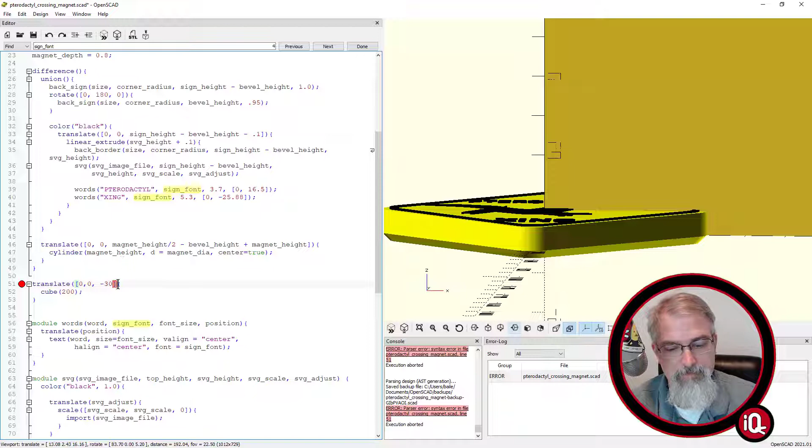What I'm going to do is cut the thing in half, just so I can prove, without slicing it, where everything is. Oh, there we go. And I can't type—there we go. Okay, and then we got to move it in the Y, -50.

There we go. Now if I add an extra difference, just temporarily, because I don't want to keep this here, we should bifurcate that guy, and we should see a lovely chewy center right there. So that's where our magnet will go.

And if I wanted it further away from the fridge, I could make it 1.2 or 1.3, and it should go further away from the fridge. Hopefully—I didn't see it move, but maybe that's just my eye. 0.8. Oh, I don't see it moving.

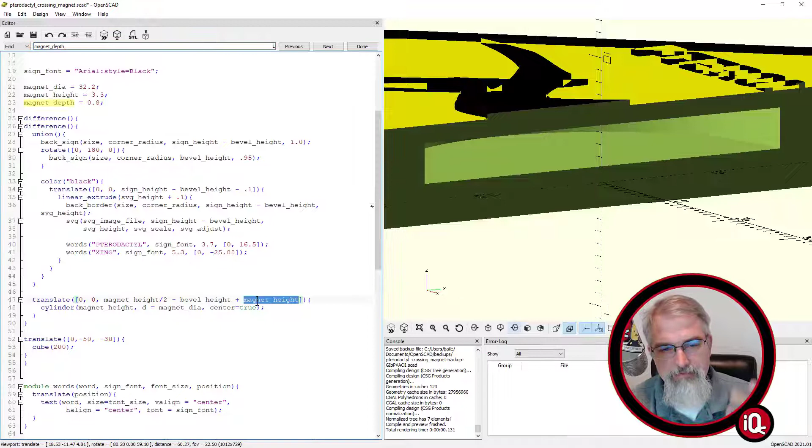Oh, I'm using magnet height, that's why. Magnet depth, not magnet height—messed up my code. Okay, so magnet depth. There we go. That would have made for a really messed up model. I'm glad I bifurcated, I would have made a really messed up model here.

Okay, that's where it should be. You see I'm relatively close to the fridge. Now, the closer you are to the fridge, the more powerful the magnet will hold. So I could do 0.4 and it would hold much stronger, but also you start getting that layer too thin, and it could break out. So I found 0.8 is a level that makes me happy.

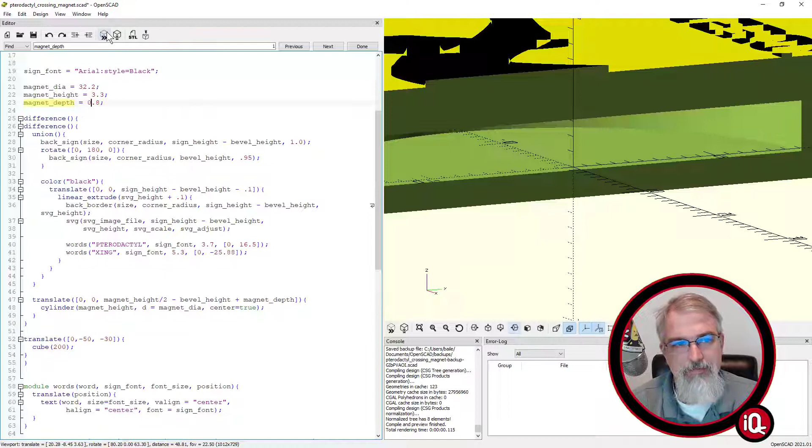Now, if you found this magnet too powerful and you want it to be less, you could get a different magnet that's less powerful, or you could move it away. So if I did 1.2, it would be further away and less powerful. There we go. So bring it back to 0.8. Well, I'm sure glad I cut that thing in half, huh? I would have messed up this code.

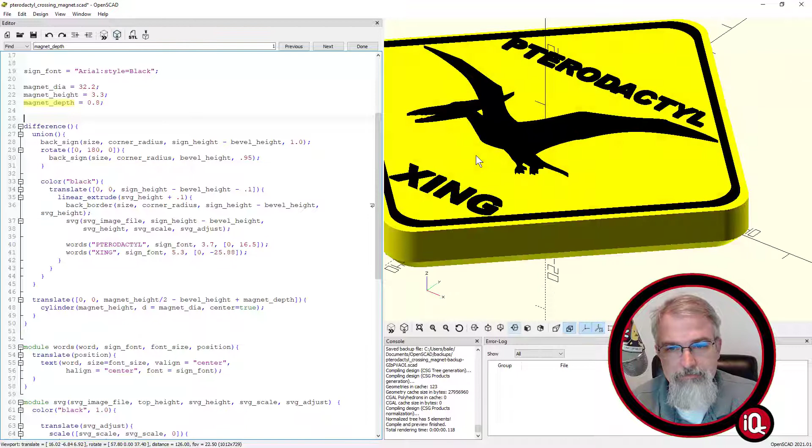So hey, it's always a good idea to double check your code, because you thought you were right and you were wrong. Oops. Okay, so we'll remove that because I don't really want to keep that around. Or, you know what, I can leave that in there for kicks—well, I should say, it's actually somewhat useful.

What do I want to do? I got an idea. We can come down here, we'll make a new module. We'll call this module the magnet—we'll call it fridge magnet. Fridge magnet, all right, boom, boom, boom.

And we'll pass everything in here, which means we're going to need all the variables. So we got everything in here, and then we'll pass everything. We'll say size, corner radius, height, bevel, corner radius—got that—bevel height, sign height. We got the sign height, bevel height, SVG height. We need that one, SVG height.

And we already got the size, corner radius, sign height, bevel height, SVG image—all these guys. I think that will do it. If I clean it up a little bit, I don't need that, I already got those. So SVG Image, SVG height—I already have that one, don't need it twice. SVG adjust. Okay, I think that is correct.

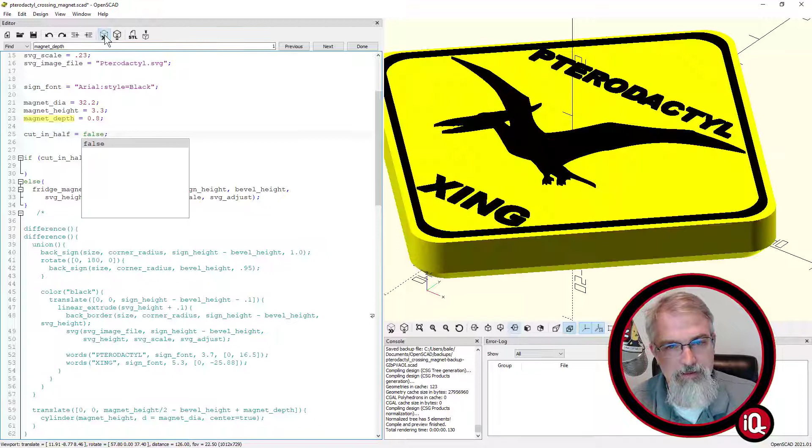Okay, so if I come down here and say don't bifurcate it, say false, it shows up—how I normally want to do it. But if I do true, so we cut it in half so we can see things, what I can do...

Is I can come back here, put this fridge magnet in here, and we'll say difference. And we'll come back in here, we'll grab that giant cube again. But I want a difference. Move that over.

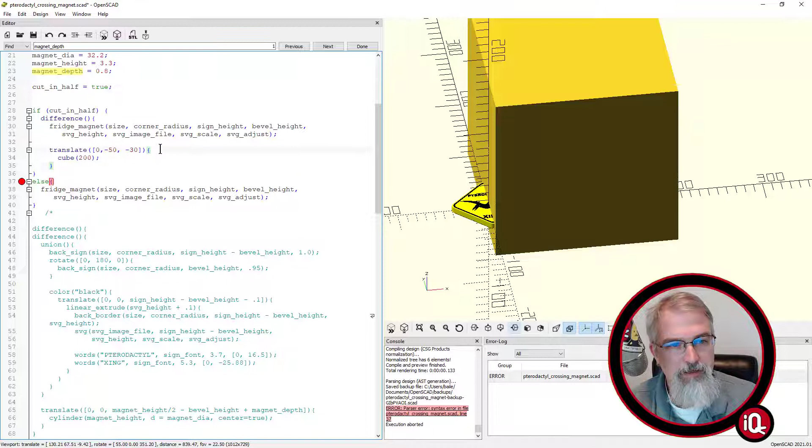And you're complaining. There we go, I think I've got it now how I want it. There we go, so now, cool. So now I can cut it in half any old time I want. It's kind of nice to have around, right? Okay, so I want to set that to false because I don't want to cut it.

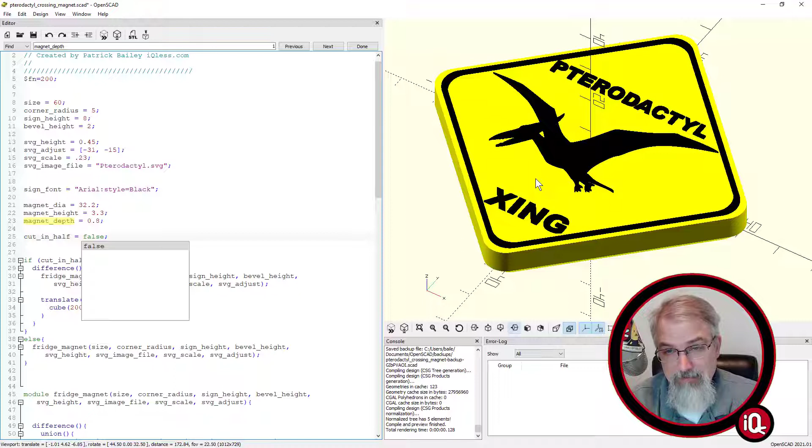Boom, pterodactyl magnet. By the time this video posts, I've already put this out on Printables, and if I have, there'll probably be a link in the show notes here. If you want a pterodactyl—I keep saying pterodactyl, I like Teen Titans Go, and that's what Starfire used to say, pterodactyl, even though I know it's pterodactyl.

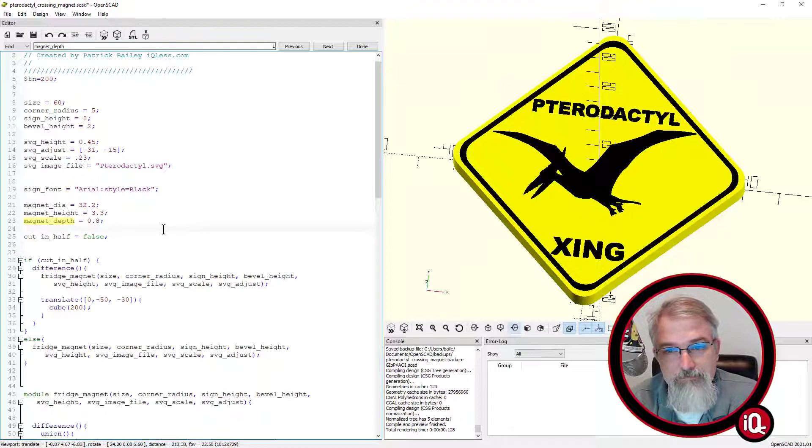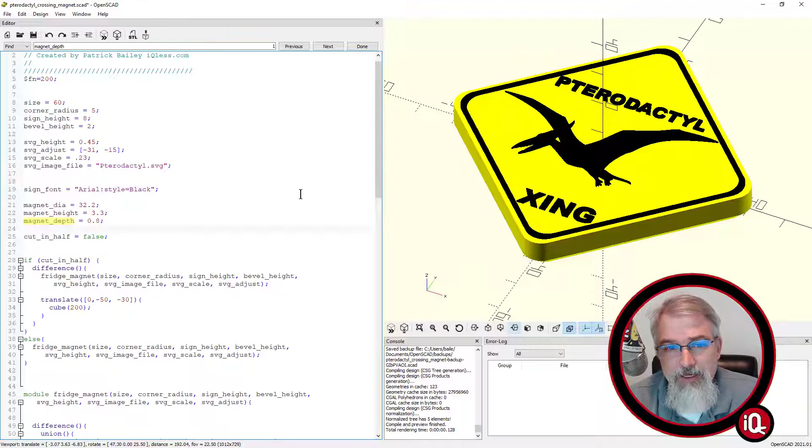Cool, there you go. So that is the thinking process behind building this magnet. So you can make your own, or you can actually take this code, and if all you want to do is, if you like this style of this crossing sign, you just want to change the words and change the image on it. I actually showed how to do that in the other video too, but you can see it's not too bad. But anyway, there's a thinking process—go make your own, and go make your own kind of a cool thing and post it. It'll be pretty cool, share it on Printables. A lot of kids would like to see a little more pterodactyls, and there's all kinds of dinosaurs. Come on. Okay, so there we go.

So with that, we can wrap this all up with this reminder that 3D printing is an engineering adventure you're on. You can develop your skills and knowledge and take this in so many ways. You can make a business out of this, you can teach others, and you can make amazing designs. So design it, engineer it.

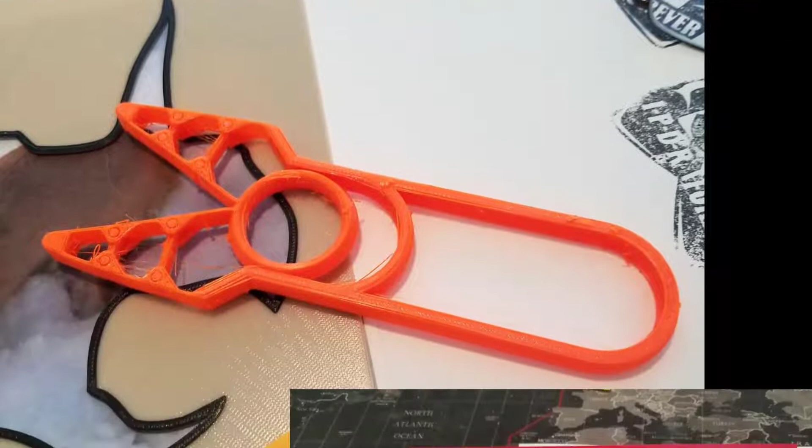I keep staring at the flexi pliers the user Cisco made, which you can see at the end of this YouTube video—it's kind of scrolling down, you'll see at the end. Go check it out, it's really cool. I have some ideas on how to redesign it a little bit and add a spot for some branding. I think this would be an awesome toy to put a logo on and pass out for free while I'm at the homeschool conference. So we'll see how much effort I can put into it, and I definitely like it as it is, but yeah, maybe I can get that done. We'll see, we'll see.